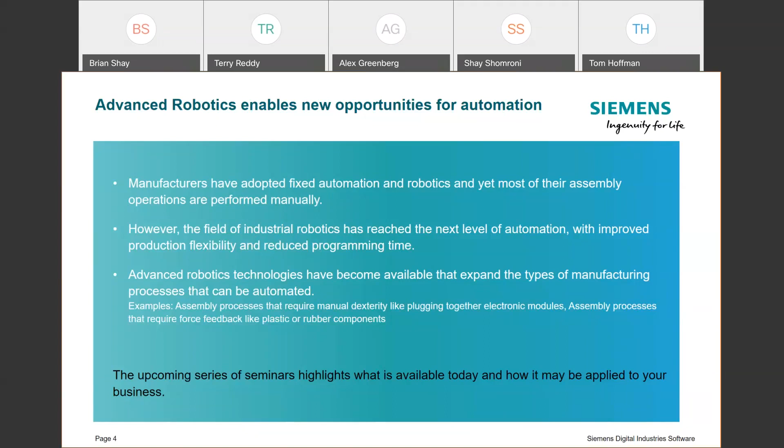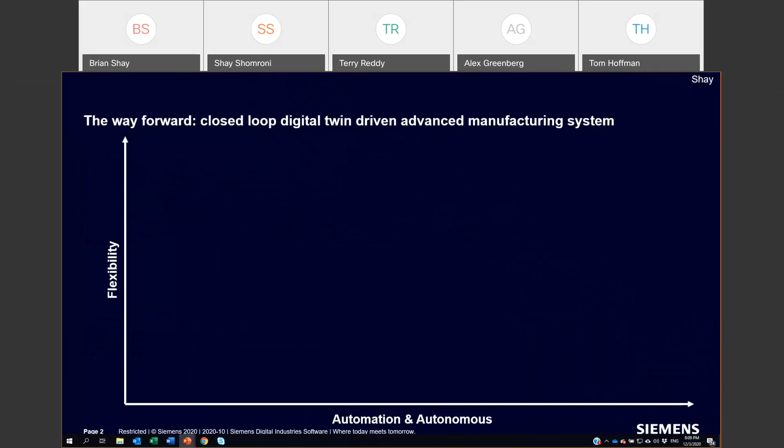So, as Brian mentioned, Alex and I want to give you a brief overview of the way that we look at advanced robotics at the manufacturing business unit in Siemens Digital Industries Software. I want to start with a quick historical view of automation in general in the last 100 years or so. The first manufacturing lines were very fixed. Only one product, maybe two products could have been manufactured on the same line. And they were also very manual, so there was no automation whatsoever.

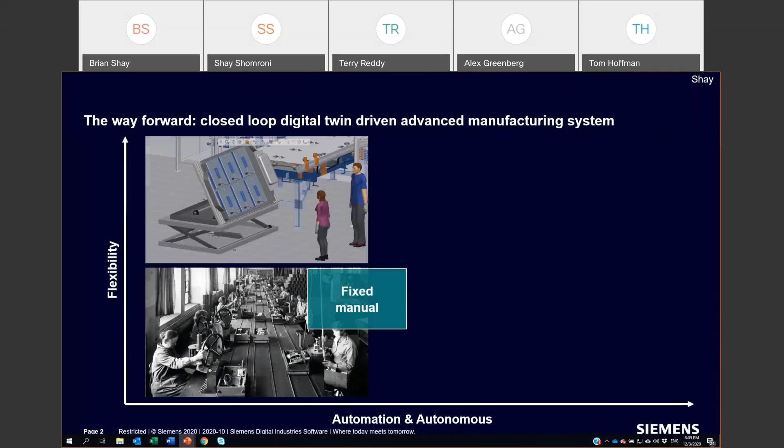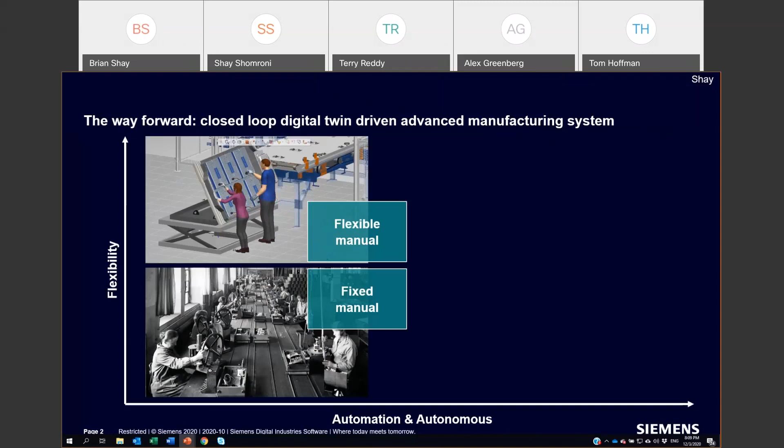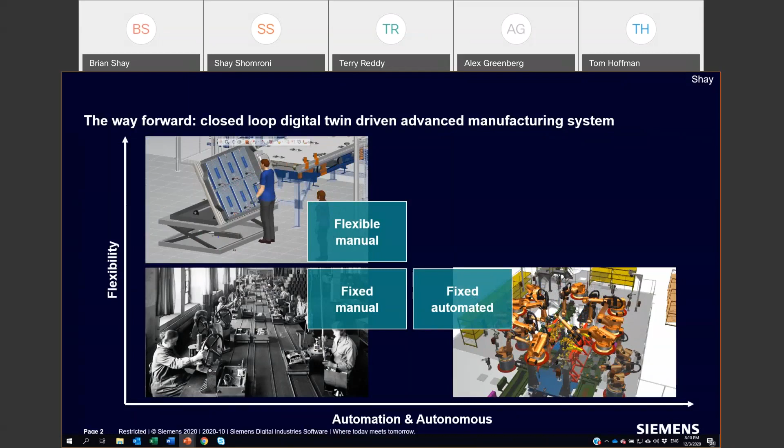During the 20th century, IT systems and electronics developed and manufacturing became much more flexible, however, still very manual. On the other hand, when electric motors and control theory came, manufacturing became much more automated, but still very fixed. Only a few variants could have been manufactured on the same line, no more than just a few.

The main challenge and the main promise of Industry 4.0 is to enable manufacturing which is both flexible and autonomous, striving to reach lot size 1 manufacturing, so that for very small batches you could change the part and the environment will be flexible enough and autonomous enough to adapt to the changing conditions and to the changing parts.

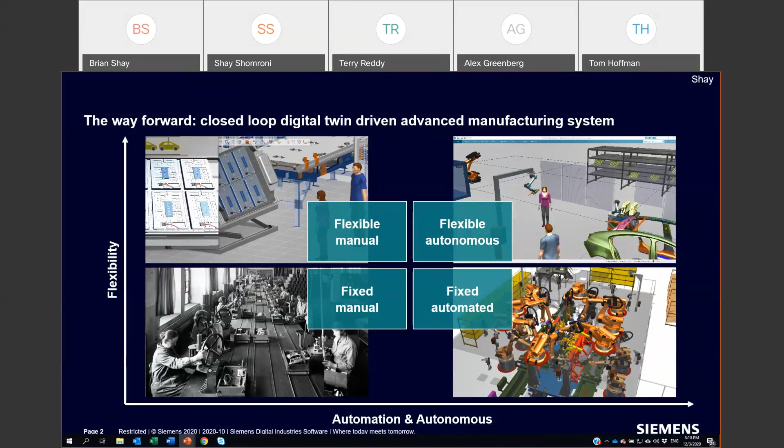So when talking about advanced robotics, there are many definitions out there. For us, advanced robotics is the area of robots which are smarter. They have sensors. They can interact with the environment and with each other on one hand, and on the other, they can also take decisions. They are autonomous or very much automated.

There are many applications involving advanced robotics, such as loading and unloading machines, machine tending, autonomous kitting, autonomous mobile robots which support flexible manufacturing and matrix production, robots carried by AGVs, robots for quality inspection, and robots which have safety features and can work together with human workers. So it's not one thing, it's actually a collection of technologies that make manufacturing much more autonomous and promote it towards complete lot size 1 automation.

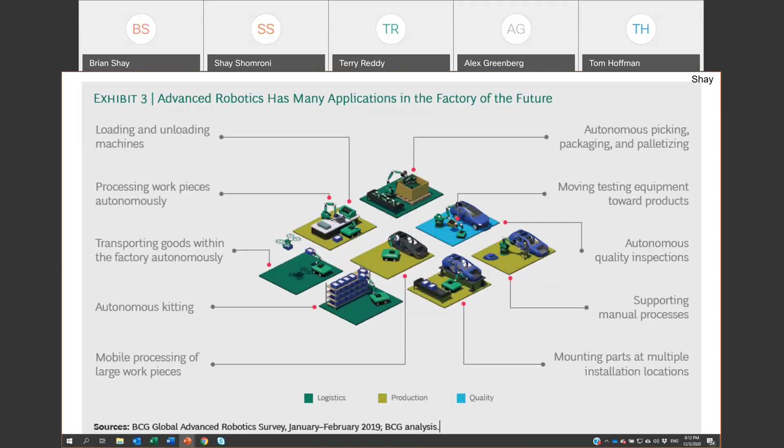We as a simulation software vendor would like to support you, our customers, who are now coping with those challenges and implementing automation, with the right software that could give you the flexibility and the capabilities that you need to plan this sophisticated and advanced robotics.

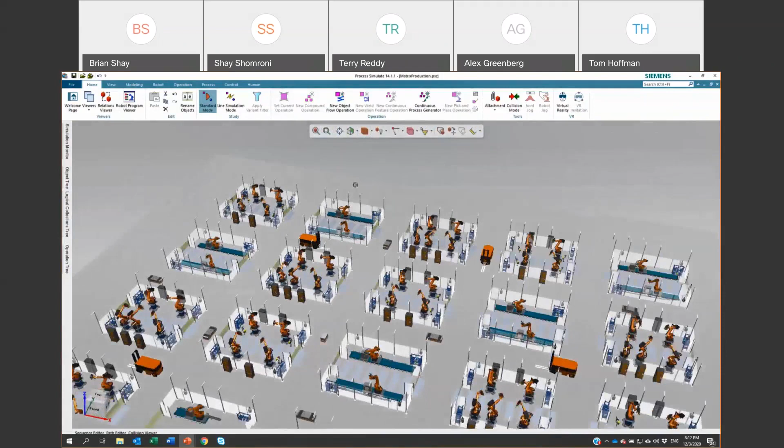In the next video, this is an illustration of a futuristic factory. It's an electric vehicle battery assembly factory. And as you can already see, it's not a linear line. The line is actually kind of a matrix, and each station has capabilities. Some of them can do the same, while logistics is completely separated from manufacturing. Logistics is done by autonomous robots that bring the parts on demand and just in time.

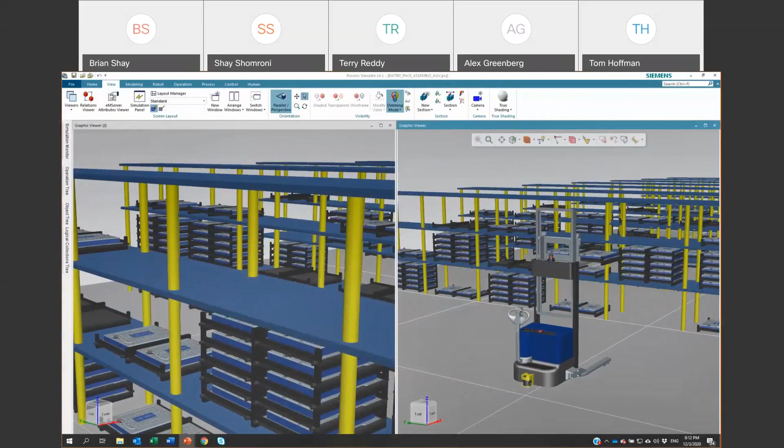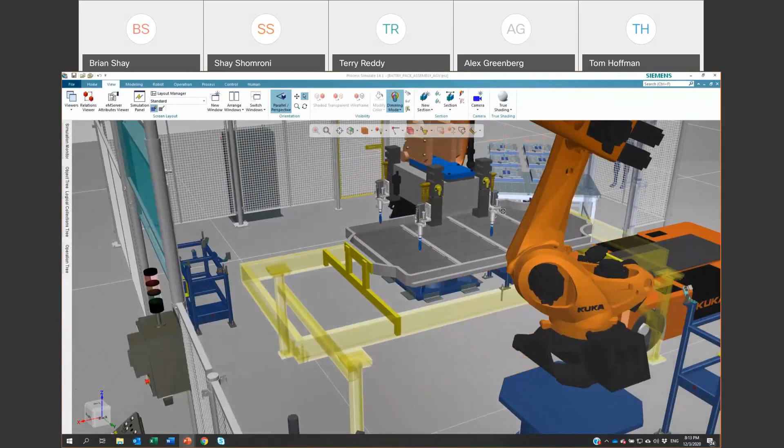In this case, these two batteries are being picked from the logistics center by the autonomous vehicle and shipped to the manufacturing station where they are going to be assembled to the part of the car. Another AGV brings the base, and now this KUKA industrial robot will assemble the batteries using a vision system and force sensor, making sure that the batteries are exactly in the right place and nothing is broken during production.

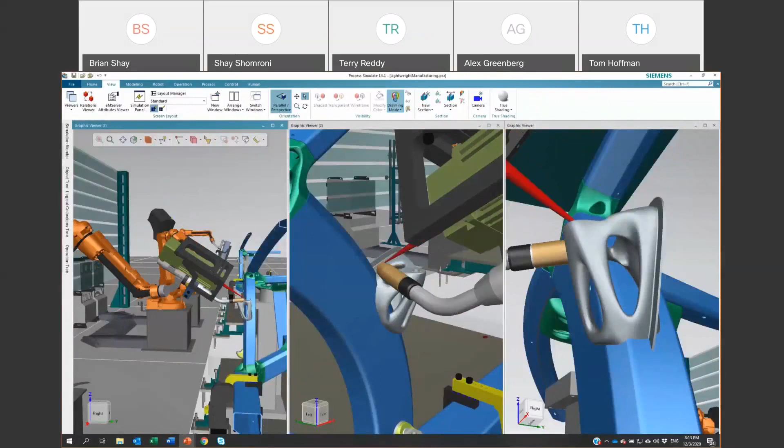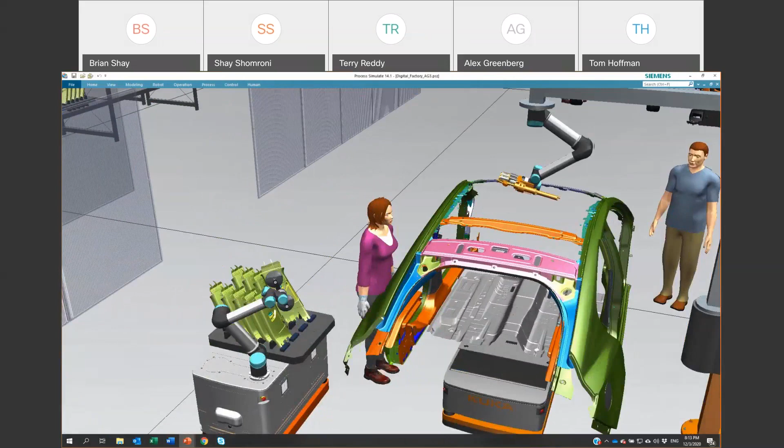Another evolving technology is that joining technology is changing due to different materials and combinations of materials at the shop floor. So we expect to see laser welding, gluing, adhesive, drilling and riveting technologies that require vision system support and advanced robotics also in body manufacturing. And last but not least, robots bringing parts, logistics, just in time, that can collaborate with human workers without safety risk, as they are supported by vision systems that can ensure safety.

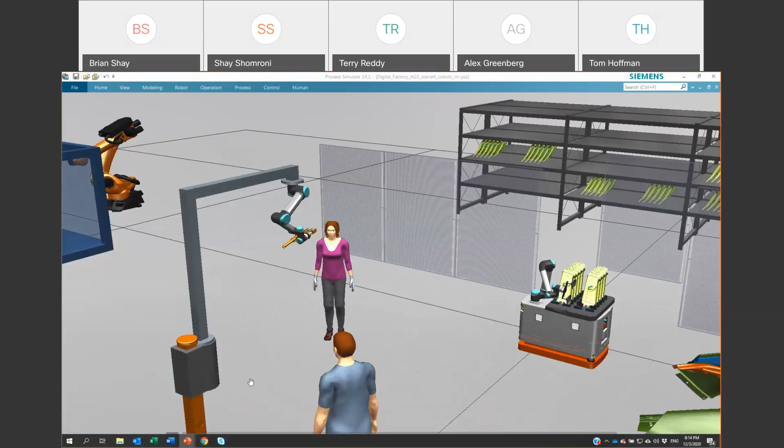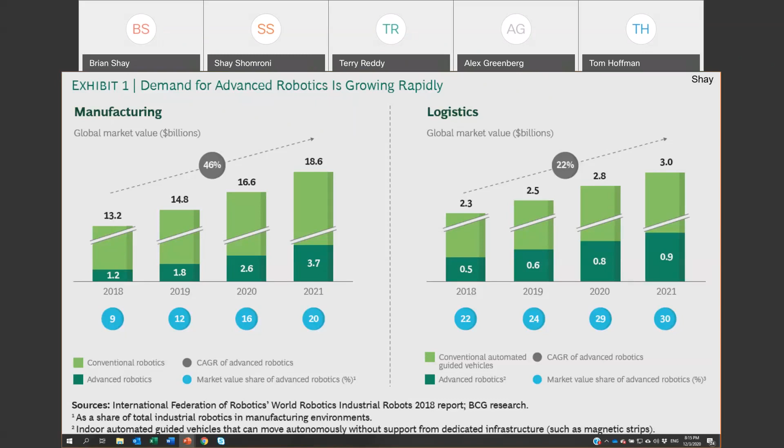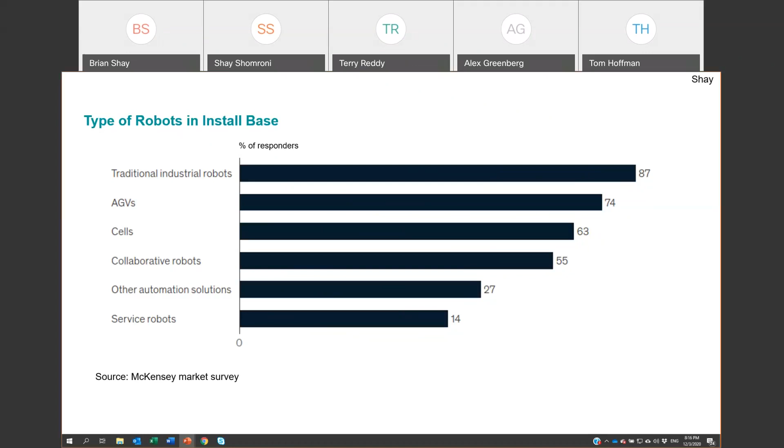So the strategy today is to combine different robot technologies in manufacturing, and the need for offline programming software, virtual commissioning and simulation software is even higher than before, as the combination of robots requires a lot of interlocking, control and planning.

To summarize the main challenges that we hear from our customers today: it is still quite expensive to maintain a robot. According to research, about 75% of the cost in a lifetime of a robot, between 7 to 10 years, goes to programming and setup. Only 25% goes for the actual hardware. So the potential saving for robotics is in the area of programming, and the easier programming can be done, the better, and there is more potential for cost saving. This is exactly where we are heading with our software components, to make it simpler for users and to save time and money in that area.

There is still a significant indirect cost of production downtime. Reprogramming requires, in many cases, stopping production and allocating engineering effort to reprogramming, which has an indirect cost. Still, robots are being used in an inflexible fashion. Although they can be extended to do more things, it is challenging to program the robot, and it takes time. So in many cases, robots are not fulfilling their full potential.

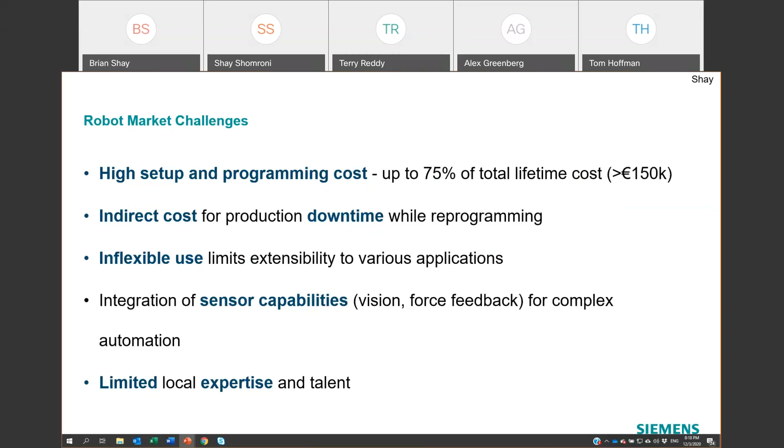What we want to do now is walk you through 5 major capabilities and use cases that we believe have a lot of benefit. I will ask my colleague Alex to take over now and walk you through some of the use cases. So Alex, go ahead. Thanks, Shay.

So to pick up where you finished, Shay, the first thing I would like to walk you through is virtual commissioning technology. Before talking about virtual commissioning, let's talk about physical commissioning for a second. Usually if you work without simulation tools, the traditional way, when you commission a robotic line, you would see the different departments meet for the first time when they come to the shop floor to set up the equipment and start running and launching the line. I'm talking about the mechanical departments, the robotics, and the PLC or control departments. They would meet each other for the first time on the shop floor and start working out all the debugging, the wiring, connecting everything together and making sure the system runs. This is usually a very stressed, painful period with a lot of problems to solve and a lot of issues to debug until you reach a good and robust running line.

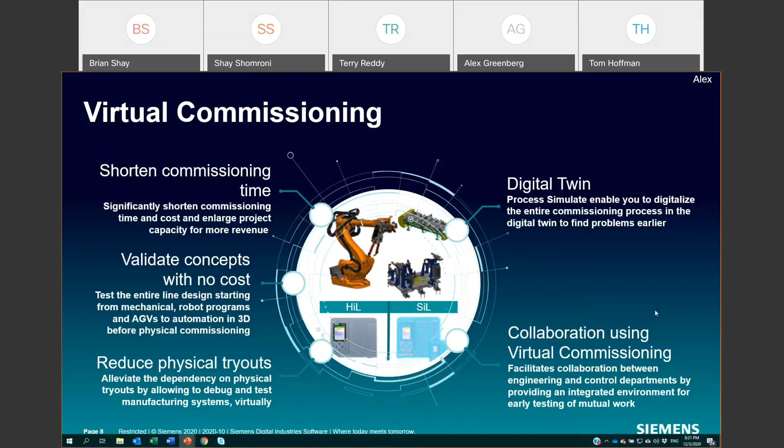So here you are a small example, a video. If you can activate it, Shay, please.

So here you see a typical scenario where it's software in the loop. Everything is running on one computer. You have Process Simulate on the right with everything virtualized, the robots, the fixtures, the grippers, and so on.

Also, the signals are mapped to what you see on the left side, which is the TIA portal environment, our control authoring environment software solution. And here during runtime, you see how everything plays together. You see the ladder diagrams activated, and subsequently the virtual equipment is controlled and the entire process is orchestrated.

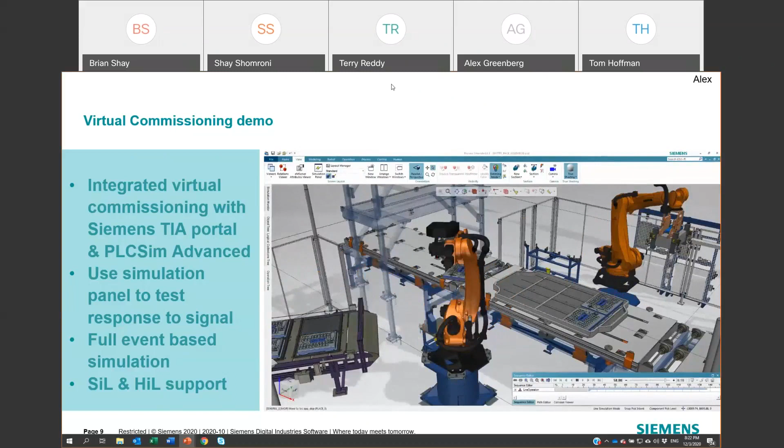So this way you can validate all the different aspects of the system, starting from the simplest mechanical sequences, through manual mode validation, up to auto mode continuous production, filling the line, emptying the line, and safety scenarios. So you can even do it just on one laptop if everything is virtualized, and this is a very lean and efficient environment that allows you to do that.

Shay, if you can switch to the next slide, please. Okay, so...

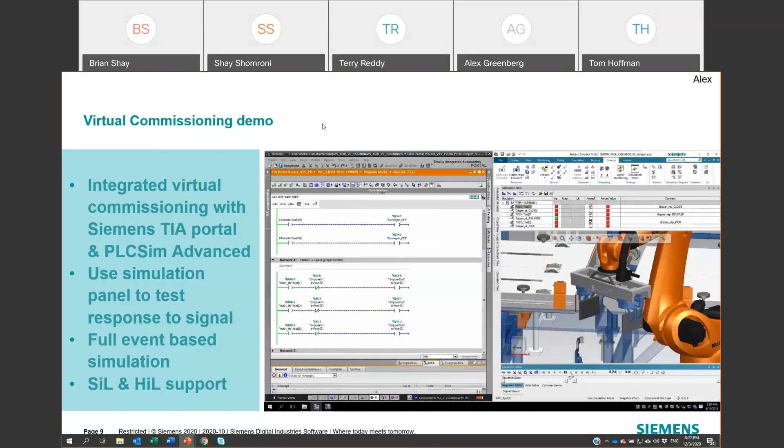Alex just presented how you can connect all the code together and make the virtual commissioning, making sure you can debug everything. When it comes to path planning and letting several robots work together, the task of synchronization and interlocking becomes much more complicated.

What we're offering here is a solution that we developed together with a partner from Boston, US, called Realtime Robotics. Together we have a solution for multiple robot path planning and interlocking. All you need to do as an engineer is focus on the engineering work, to define the final position of the robot, the waypoints in that case.

So you don't need to worry at all about how the robot should get there, or where it should wait for the other robot to avoid collision, or how to make sure there's no clash in the way between the robot and the environment. The algorithm we implemented and integrated into Process Simulate allows you to just define the final positions. All the rest is done by the algorithm, in real time.

Including the interlocks between the robots. Moreover, the algorithm finds the optimal way to do the job considering all robots working together. So in many cases there won't be any interlocks at all, because the algorithm avoids them in the first place. In other cases there will be a wait, but as minimal as possible.

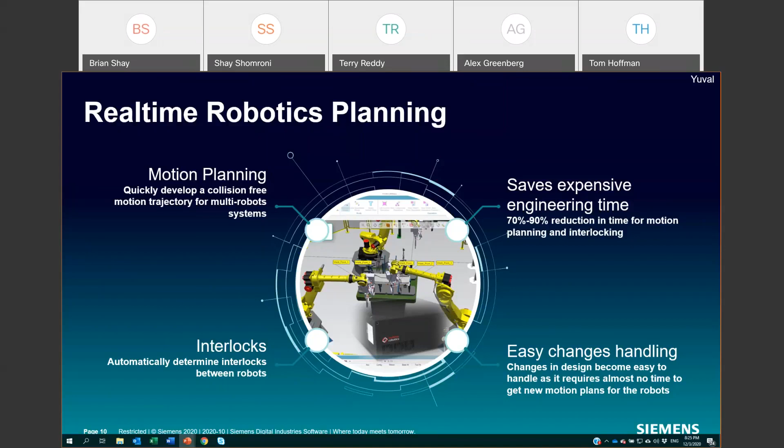Let me show you this example. Here you see 4 robots that weld this car bottom. Nothing was planned yet, only the final positions, only the weld points, and naturally they collide with each other and also with the environment.

Now all you need to do is connect each of the robots to the service — the real-time service integrated into Process Simulate — and do some configuration. You can set strategies for which robot should get priority over the other, or different types of strategies in the system. Then you run the simulation again.

Nothing was changed — no path planning, no programming — you just run the simulation again. Now these 3 robots can work together, with no risk of collision. And as you saw, one waits for the other, but for the minimal time.

The 4th robot got into position only when it was safe for it to do the work, but no engineer or human being had to set anything — everything was done in real time. It's a sophisticated algorithm that is in many ways like a GPS: it calculates all optional roads, and in real time selects the right road, and if there's a roadblock — in this case a robot interlock — it finds the best possible path.

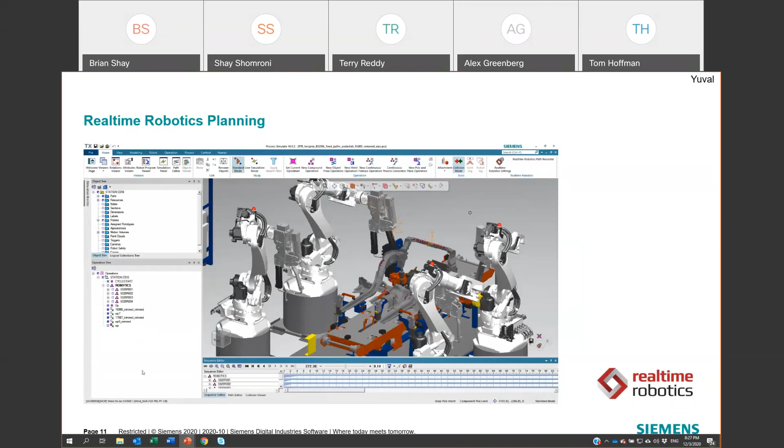Okay, Alex, do you want to take this one? Yeah.

So regarding safety, the next topic. That's another very important aspect of robotic systems. In recent years, most robot vendors introduced advanced safety features into their robots, and one of them is the ability to create safety volumes. This is a widely used capability across different robot vendors, which basically allows you to define virtual volumes around different parts of the robot and the station, for example around the end of arm tooling or certain links of the robot, or around important areas in the station, creating defined areas in which the robot is restricted to move into.

This, of course, allows much more control over the safety of the station. Traditionally, you would do this with the teach pendant on the shop floor, which is rather challenging for the operator, because you need to imagine how this would look, what sizes to define, and struggle to understand if what you defined is good enough and serves the purpose. Here, the 3D virtual environment serves you very efficiently, because you can step into it and design those safety volumes.

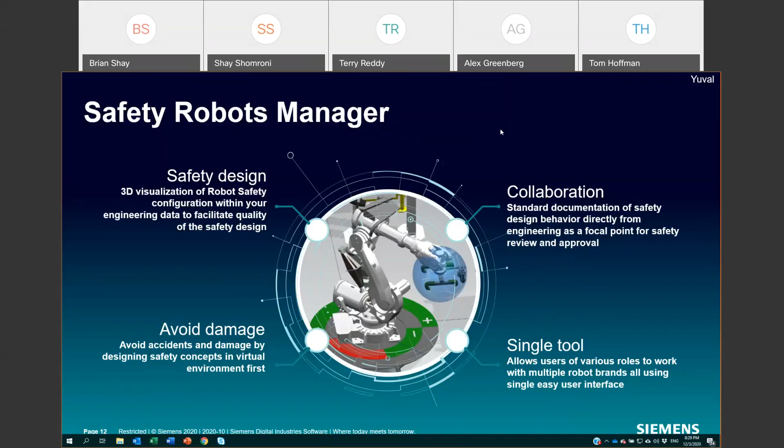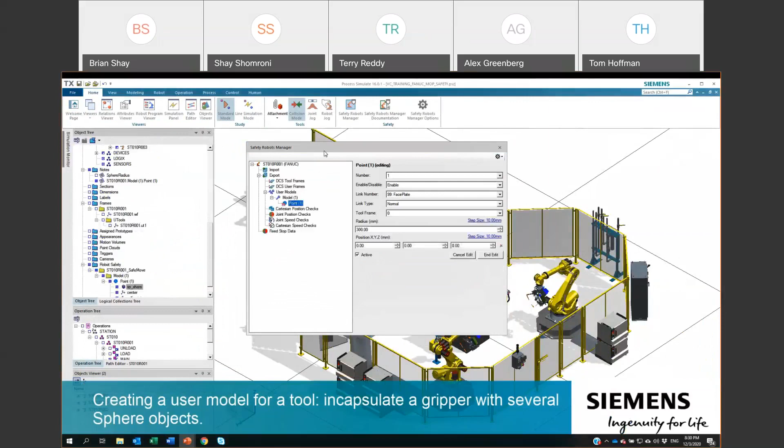Shay, if you can skip to the next station slide. So here you can see a demo. Again, this is the standard Process Simulate work—you have the 3D environment of the station, and here you have a tool, the Safety Robots Manager, which allows you to create different volumes, different primitives, or combine them together. Here, for example, you do it around the gripper, and you have various tools to shift it around and control the placement and the size.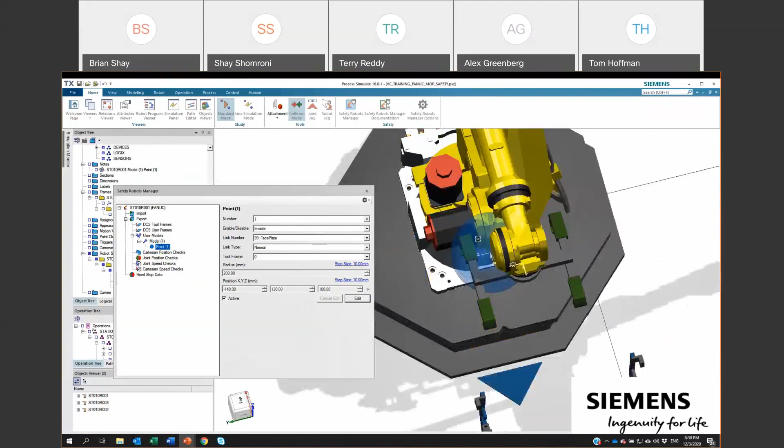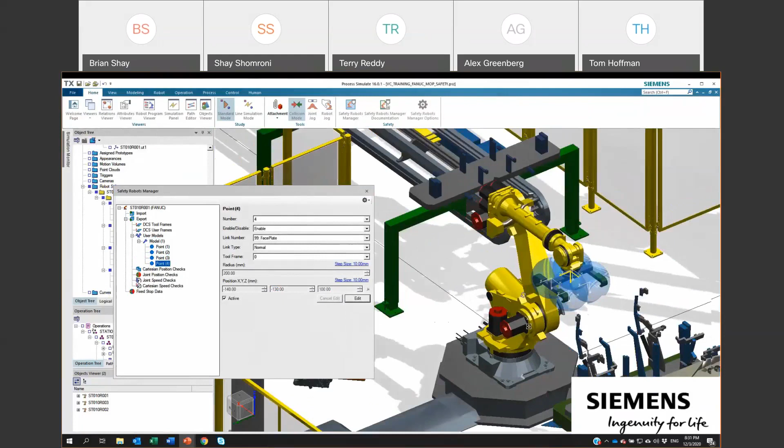Eventually, when you finish, this is attached to the right part of the robot. As you see here, you can combine several primitives together into one block of volumes that would surround the gripper efficiently. Obviously, doing that without visualization would be quite challenging. And here you see another volume defined in some part of the station, which creates a bounding box around the robot.

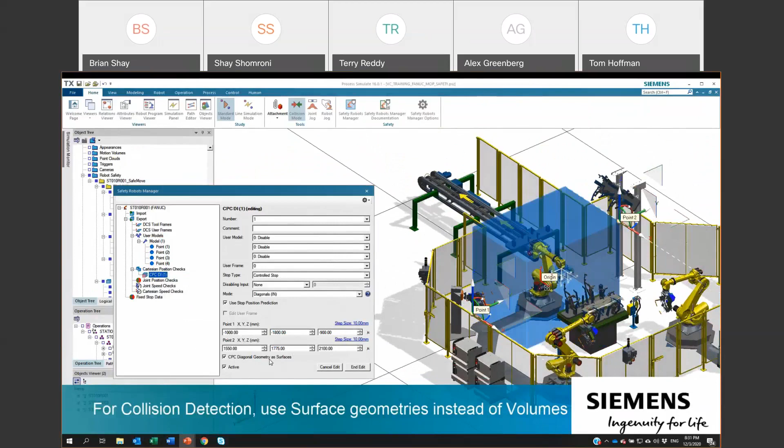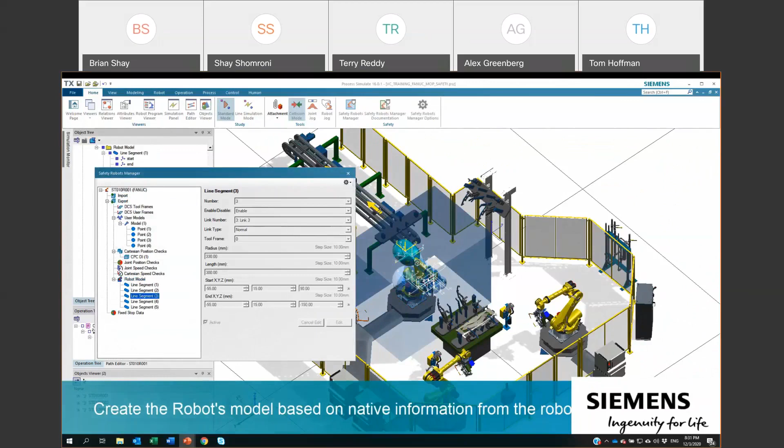Once you finish creating that according to your requirements, you can use those volumes with the standard features of Process Simulate, like I mentioned, collision detection and other measurements. So here in a second you will see additional creation of volumes, like around other links of the robot, as you can see here. Basically, this way you can author the entire safety structure of the station.

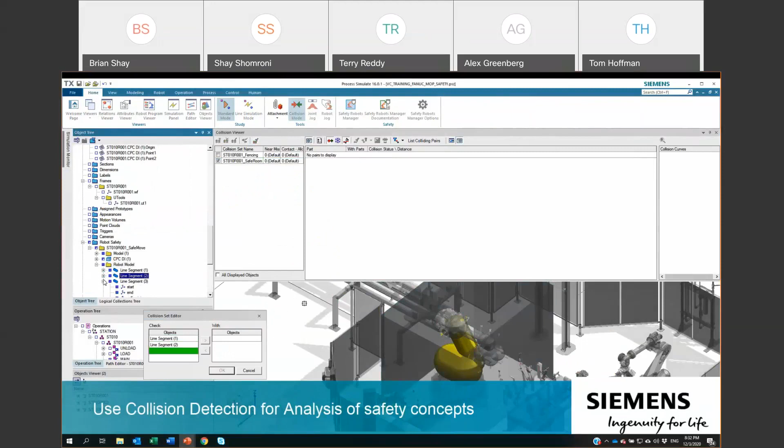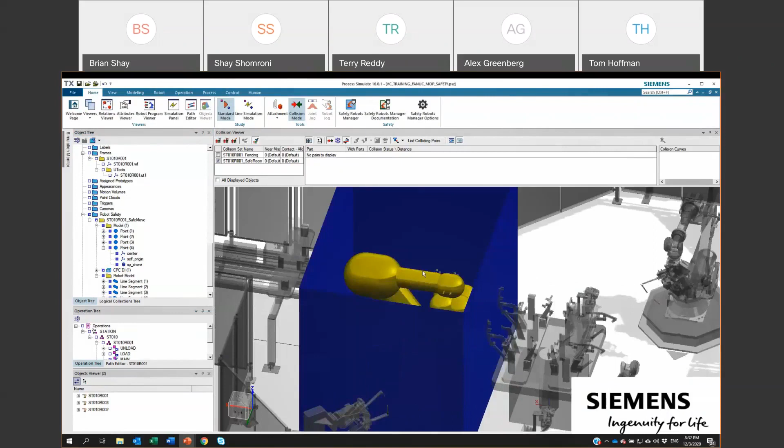Now you activate the collision with the right collision sets defined. You can include these volumes in collision sets, and once you run the simulation, those volumes will be considered. You can really validate that your safety setup is correct and works properly before you go to the shop floor, which speeds the whole process up and reduces the risk of wrong definitions and running into issues on the shop floor.

And as I mentioned, by the way, it's not shown here in the demo, but you can also generate the right documentation out of this environment, so it creates the documents required for safety clearance.

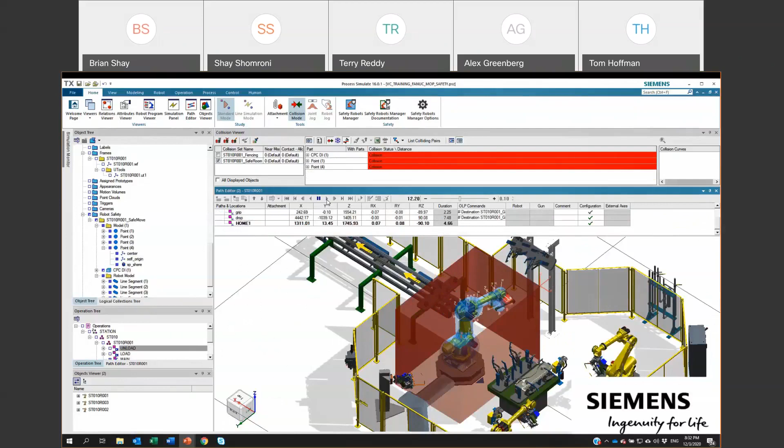Okay, next topic. We're stepping into another area, addressing the challenge of programming robots. As Shay mentioned, usually you need quite high expertise in order to write robotic code. Here we introduce another solution, based on programming robots without writing any code. You use templates instead of writing code lines for the robot—templates ranging from the most simple, like robot motions or move-to-state, to quite complex tasks involving force torque sensing and vision.

If you recall, Brian mentioned in the beginning the dexterity of humans. And as we see in latest trends, robots are acquiring this dexterity quite rapidly because you have quite affordable force torque sensors now. You have quite affordable vision cameras, and if you connect it all to the robot, it basically enables the robot to become much more dexterous and smart. But the thing is that you need to program it.

You still need to program, and here this solution comes into place and allows you to program even most complex force control or vision control tasks just by using some predefined templates, and all you need to do is just parameterize them, and by that achieve very quickly a full program in a matter of hours instead of weeks or even months it would take to write this code for an expert.

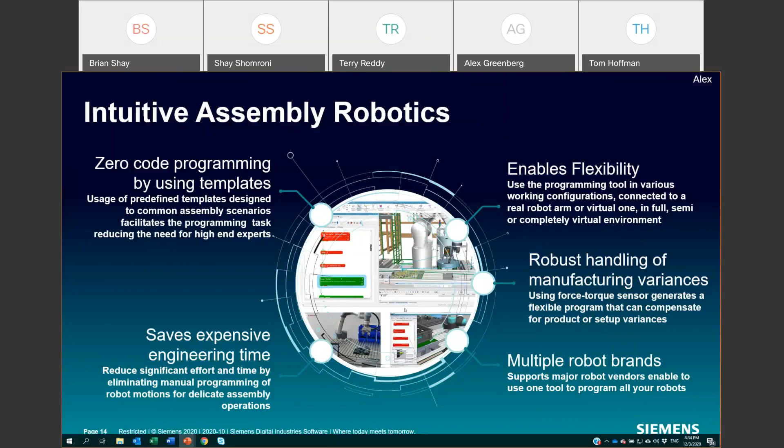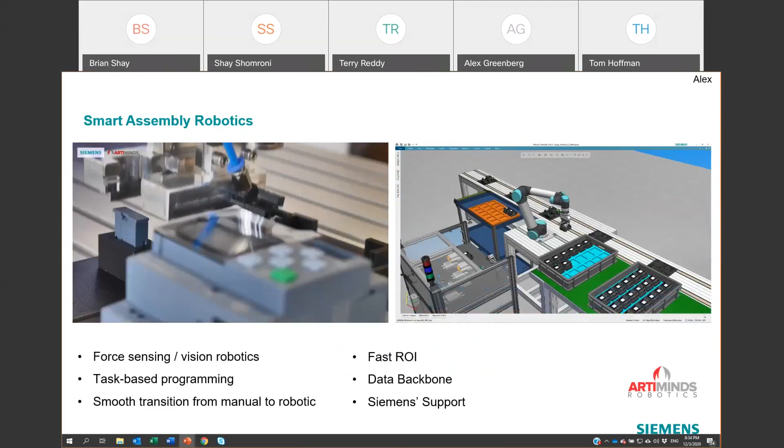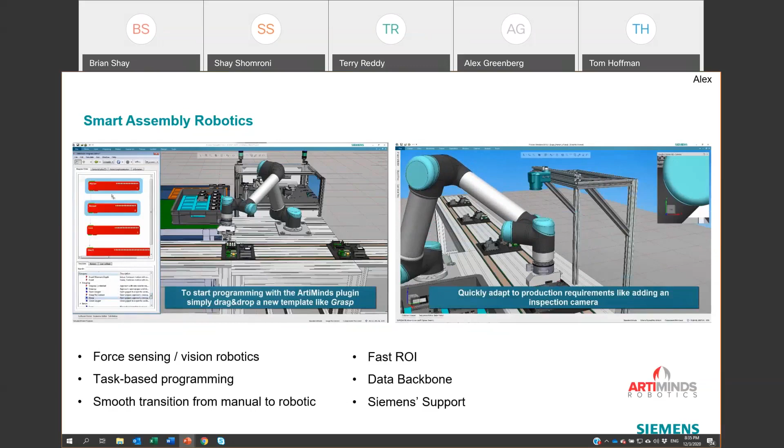So Shay, if you can skip to the next slide. Here you see an example. Again, Brian mentioned in the opening, snap fitting, connecting plastic parts together, connecting PCB parts, inserting PCB components onto the PCB board, which is called through-hole technology. All this can be done with this tool without writing even one single line of code, just by dragging templates into the programming area from a library of predefined templates and parameterizing them very quickly. All this can be achieved offline in the Process Simulate environment.

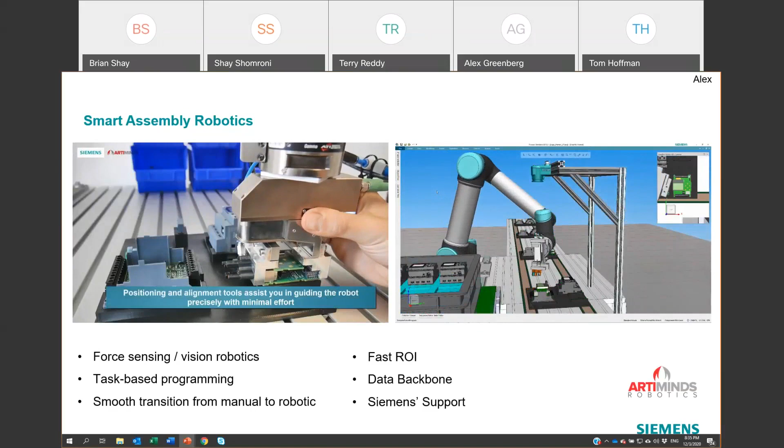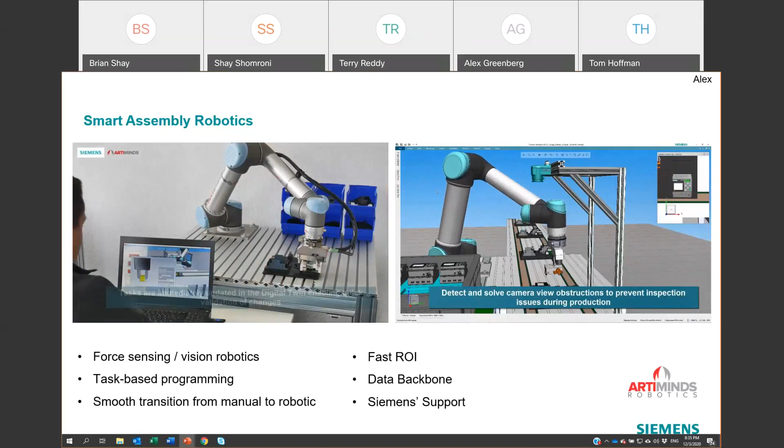And in addition to that, which is new in Process Simulate, this allows you to connect to the actual robot with a LAN connection and basically program the robot also interactively. So you have two options, both offline and online. You can immediately validate what you are programming with the actual robot and basically achieve a very robust and efficient programming process.

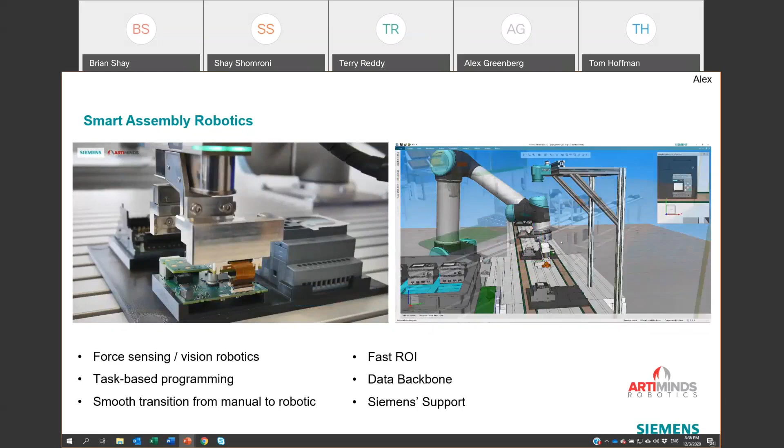Now, one note of how we implemented it. We partnered with a company called ArtiMinds from Germany, which developed this technology, and released a solution to the market, which allows you basically to enjoy the combination of Process Simulate advantages together with ArtiMinds' technology plugged in, which allows you to use those templates to program the tasks that you see here now in the demo.

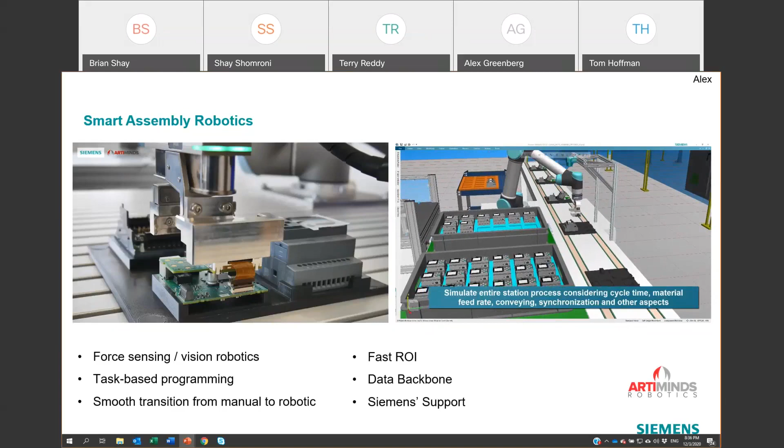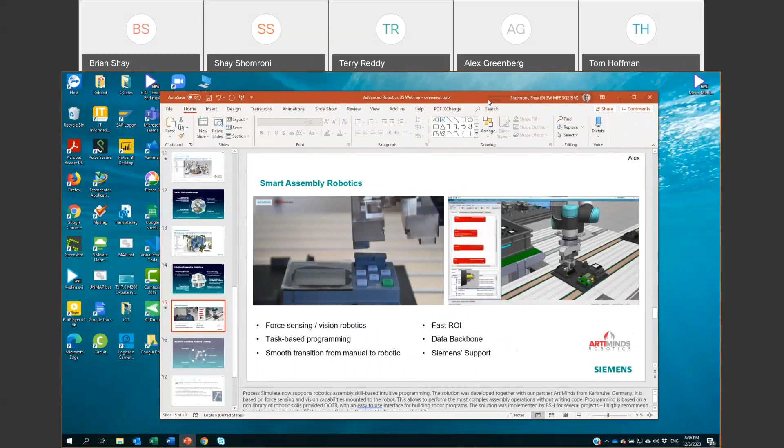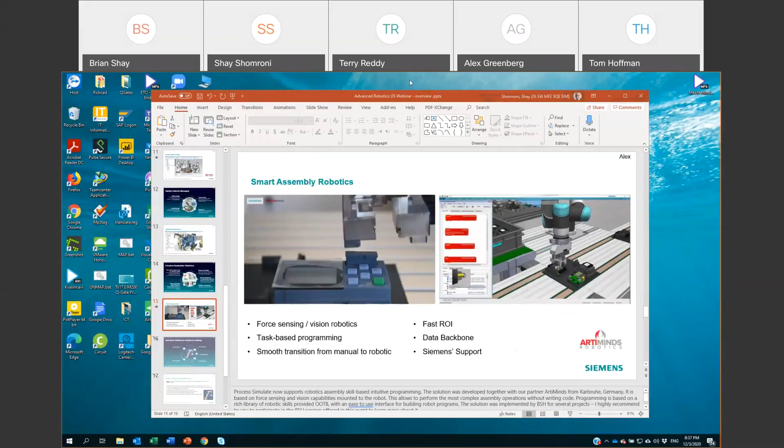Tom, so can you take over? All right, so I think... Shay, do you pass the turn? Make me a presenter. Okay, let me try to do that. Or Brian can, right? Tom Hoffman. So stop sharing, right? This one. Okay. You should be able to share now, Tom. Not yet. Shay, I think you need to drag the small ball to Tom. Yeah, there we go. Thank you. Okay, you see my screen? Yeah. Okay, good. So good afternoon, good morning, good day, depending on where you're at.

Basically, this presentation is the last in the series. It will be focused on cold spray methodology. It's not necessarily a new function that's being released in the application. Basically, it is a look at the power of the digital twin, the utilization of the tools in a managed way, combination of tools like NX and Process Simulate to develop methods to support the cold spray technology. Cold spray is similar to the additive process, just slightly different.

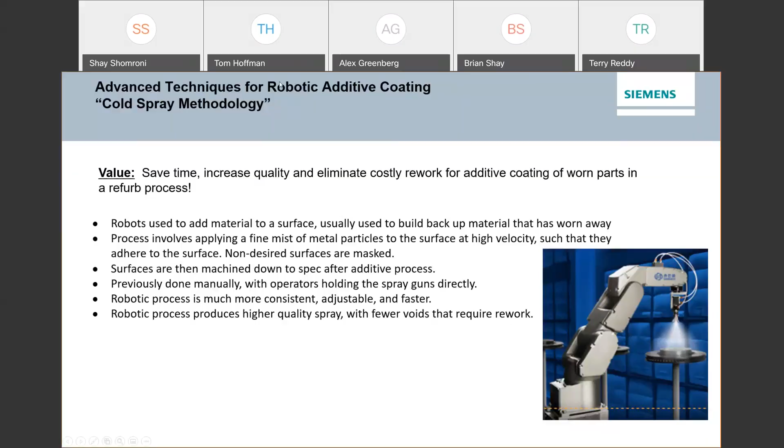So with that, I will want to stop sharing, and I need to send this back over to Brian. Do I just take that ball and put it on you, Brian, or do you have to? Yeah, I guess I do. And Brian's going to bring up the slides so that we can close out the session for you folks here. So go to the slide just before that.

There you go. So the next session is, you've seen some of the precursor to that, right? The automated robotic motion planning, the RTR, real-time robotics type application. Those of you that program robots for a living know, especially in simulation, that there are tools in simulation to get you from point A to point B and try to develop collision-free paths. But these tools are more advanced. They can get you there very quickly, collision-free, and working together.